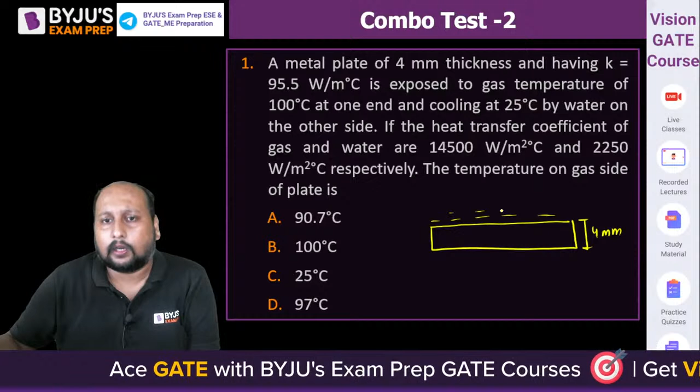Let me draw the diagram to help you guys. This is your plate, having a thickness of 4 mm. Above this we have gas, whose temperature is somewhere around 100 degrees Celsius. Below this we have water, whose temperature on the other side is 25 degrees Celsius. You have to tell me what is the temperature of the plate at this interface. Let's say this is TP, which you have to calculate.

Here is your gas, here is your water, and they have given you the convective heat transfer coefficient for gas and water: Hg is equal to 14,500 watt per meter square degree Celsius, and Hw is equal to 2250 watt per meter square degree Celsius. Quickly tell me what will be the temperature at this TP.

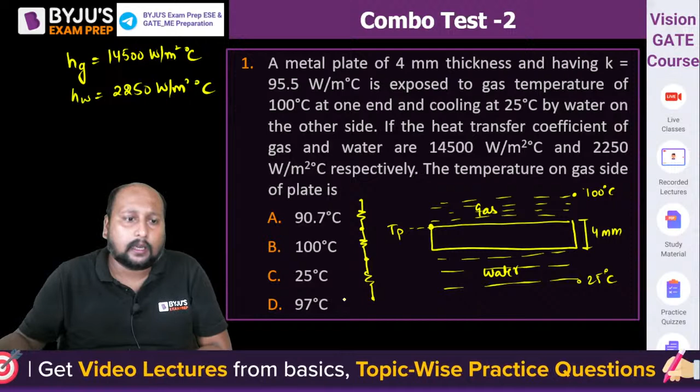Now, can we say these are three resistances connected in series? If you look carefully, this is your convective resistance, this is the conductive resistance, and this is your convective resistance. Fine, these are three resistances connected in series. If you try to draw it in a horizontal way, this is...

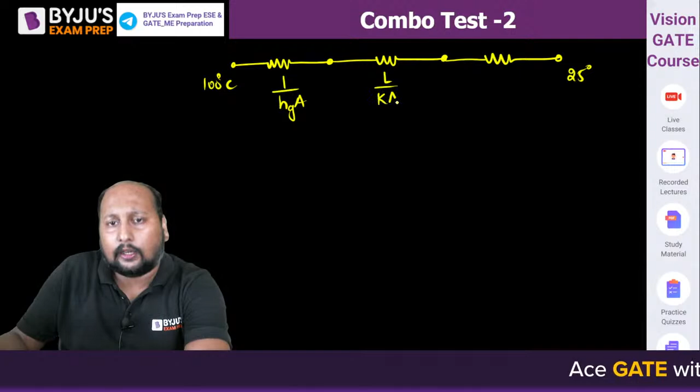your 100 degrees Celsius, right? This is the convective resistance, this is your conductive resistance, and this is the temperature of the water, that is 25 degrees Celsius. If I write the flux equation: 1 upon Hg into A, plus L by K into A, plus 1 upon H of water into A. This is the total resistance.

Let's do it. So heat flux is equal to, let me calculate first the total resistance. The total resistance is equal to 1 upon Hg into A plus L by K into A plus 1 upon Hw into A. The value of Hg you know, that is 14500.

Let us take A as common. Length is 0.004 divided by K value, what is the thermal conductivity? 95.5, okay, plus 1 upon 2250. I'm taking A as common.

So tell me, what is the value of the total resistance that you are having? I'm taking A as unity, I'm taking A is equal to 1 meter square. I'm calculating the heat flux.

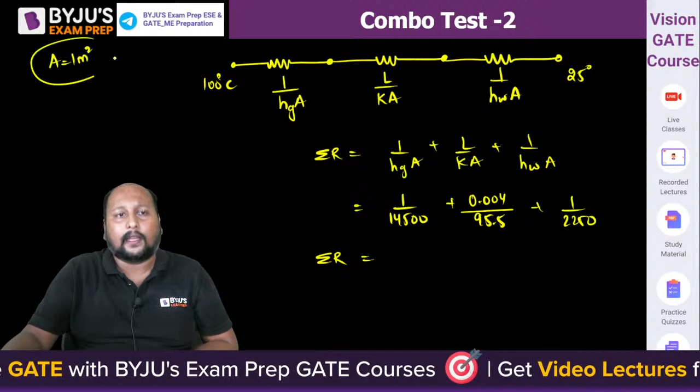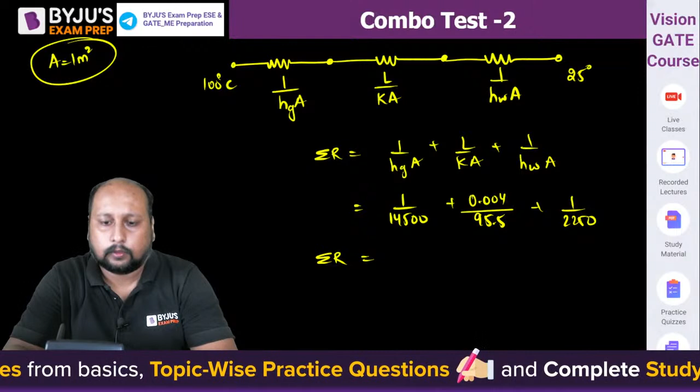So what value are you getting? Approximately you can calculate, let me know. Let's try to calculate. So 1 divided by 14500 plus 0.004 divided by 95.5 plus 1 divided by 2250.

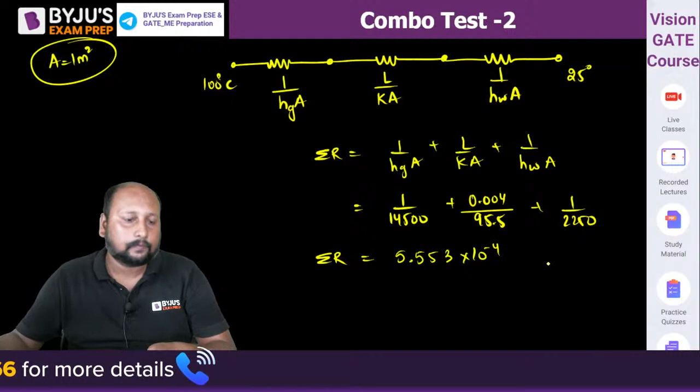Are we getting 5.55? Are we getting 5.553 into 10 to the power minus 4? And the unit will be meter square Kelvin by watt.

Yes, done, okay. So we got the value of R. Now we can calculate heat flux, which is equal to the temperature difference divided by the total resistance.

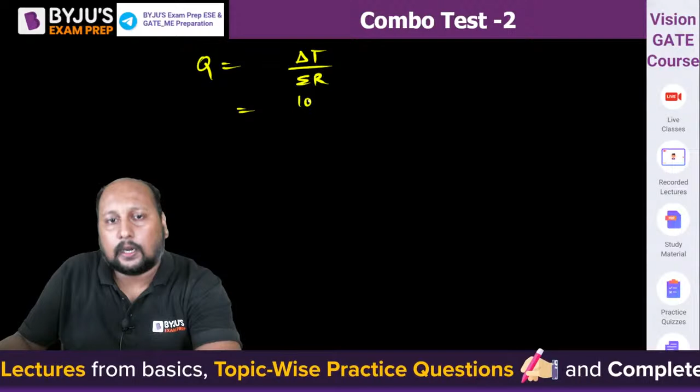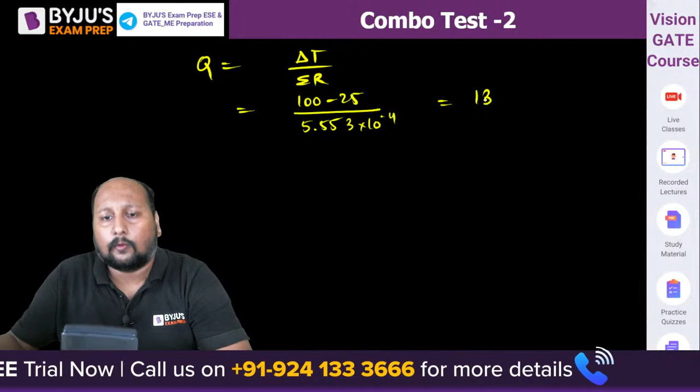Okay, now we know that. Now they are asking you what is the temperature of this TP, so we can take this equation. You take this one: we can say Q is also equal to 100 minus TP into H of G, right?

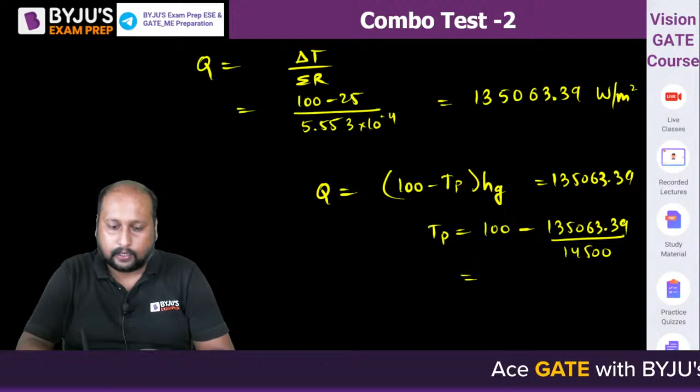What value are you getting? That is 14,500. 100 minus the answer, are we getting 90.69 degrees Celsius? This is the temperature of the plate that we are getting. This was a 2 marks type question.

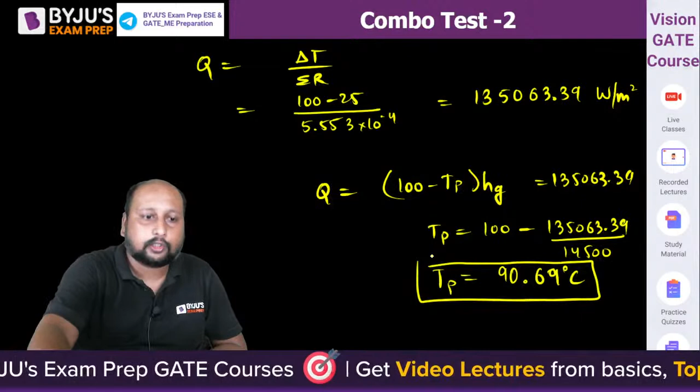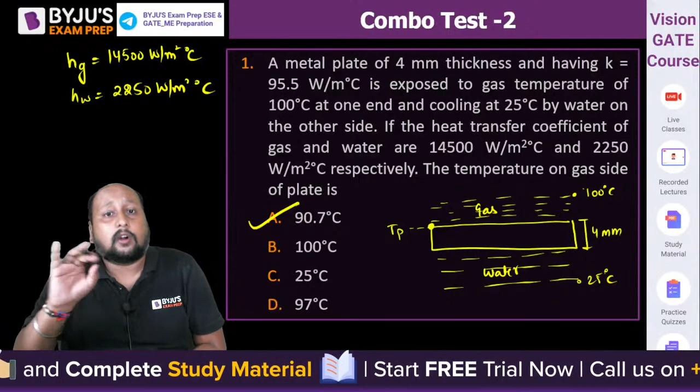Okay, 90.69. Option A is the correct answer. The first question was a 2 marks type, we have solved it completely. 90.69, that is 90.7 degrees Celsius, is the correct answer. The question was not difficult, only thing is you need to have the correct approach.

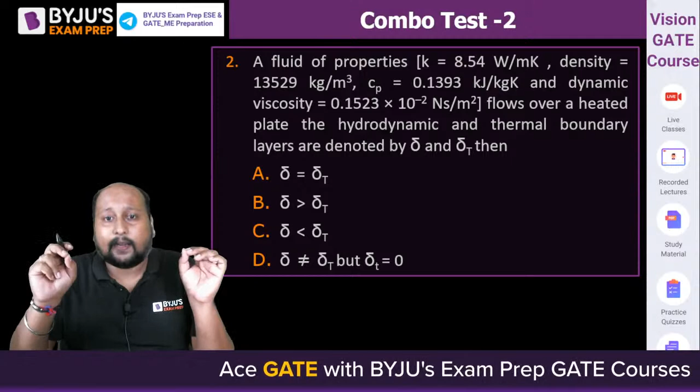Question number 2, a very easy question, a 1 mark type question. A fluid of properties: K value is given, density is given, specific heat is given, and dynamic viscosity is given, flows over a heated plate with a hydrodynamic boundary layer and thermal boundary layer thickness denoted by delta and delta T.

Which of the following is correct? So to identify this, we have to calculate the Prandtl number. Prandtl number is equal to mu Cp by K. Just check this, whether Prandtl number is greater than 1 or less than 1, that's it, the answer will come.

Mu Cp by K, so this is equal to 0.1523 into 10 to the power minus 2. Cp is 139.3 divided by K is 8.54. Tell me, what is the value?

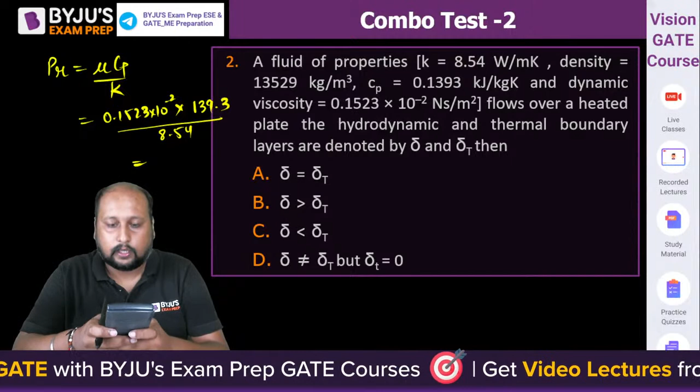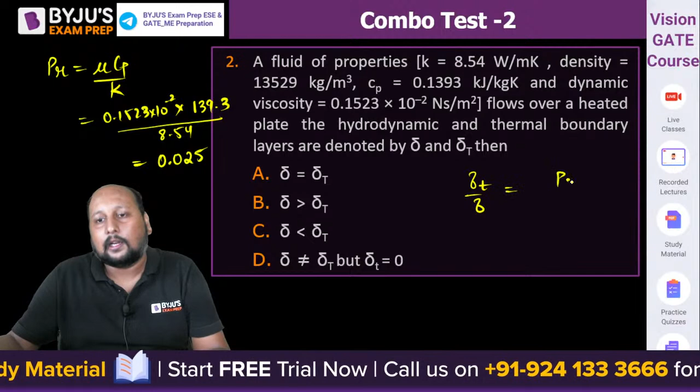Are we getting 0.025? And we know that delta T by delta is equal to Prandtl to the power minus 1 by 3 divided by 1.026. So approximately we can say as Prandtl number is less than 1, delta T is greater than delta, because Prandtl number is less than 1, right? So option C is the correct answer.

Option C is the final correct answer. Is that clear to everyone? Let's move ahead, very good.

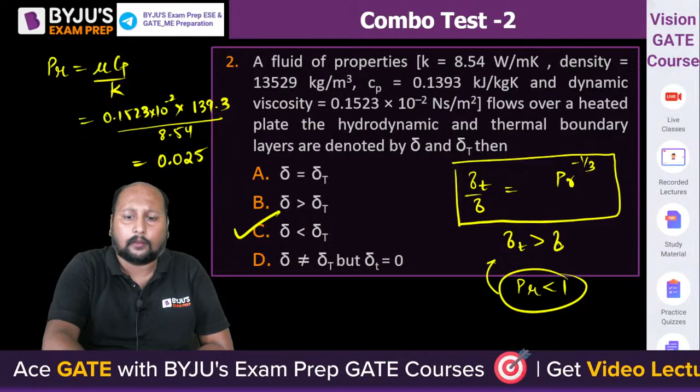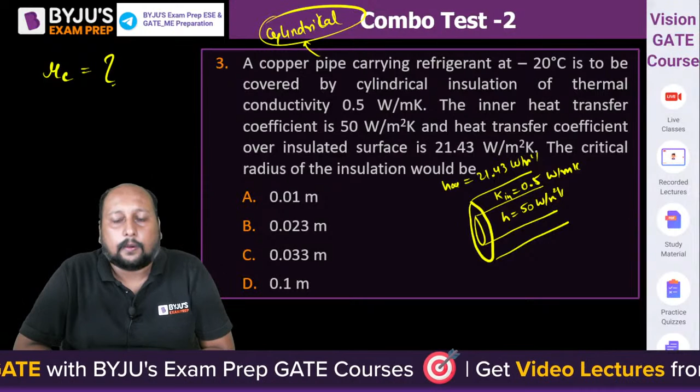What is the value of critical radius of insulation? Option A, option B, option C, or option D? It is equal to the insulator divided by the h of your ambient outer, that is h infinity. That is equal to 0.5 divided by 21.43. Solve it.

The answer for this is option A, B, C or D: 0.5 divided by 21.43, that is 0.0233. Option B is the correct answer. Are we getting option B?

Always remember, we always need to take the convective heat transfer coefficient of the ambient surface, because the insulation is always given on the outer surface. Whether heat dissipation happens from outside or not, that's the reason we are giving the insulation. So we are always dealing with the convective heat transfer coefficient of the outer surface. Option B is the correct answer.

They have given both H of the inner surface and outer surface, so make sure you don't get confused. If you do it that way, that would also seem like an answer. If you take H equal to 50, that is also present there. I think option A or D would be the incorrect answer that results, meaning option A would come up, which is incorrect. Is that clear? Understood? Done?

Question number 4 on the screen. An enclosure 1 x 2 x 4 consists of 3 surfaces. Flat surface at the bottom, 1 x 2, having an area of 2 meters square. The flat surface at the top is 1 x 2, A2 is 2 meters square, and all vertical surfaces together are taken as A3, that is 24 meter square. All the surfaces are flat.

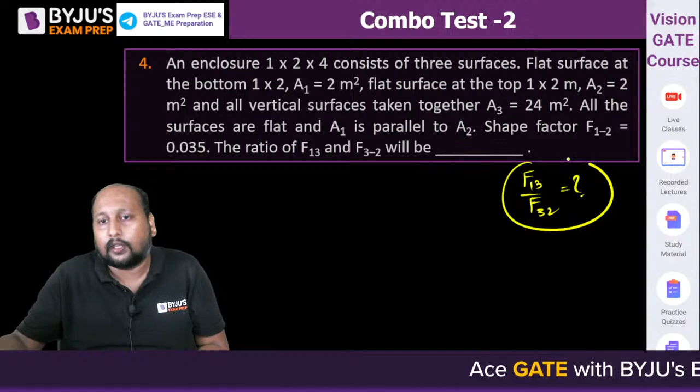They have not given the diagram. They are asking you what is the ratio of F13 by F32. This is the ratio they are actually going to ask. Tell me quickly. This is a 2 marks question in the exam, very easy, but I'm still giving you 2 marks for this because students actually get confused when they are not seeing the diagram and the question is being asked from shape factor.

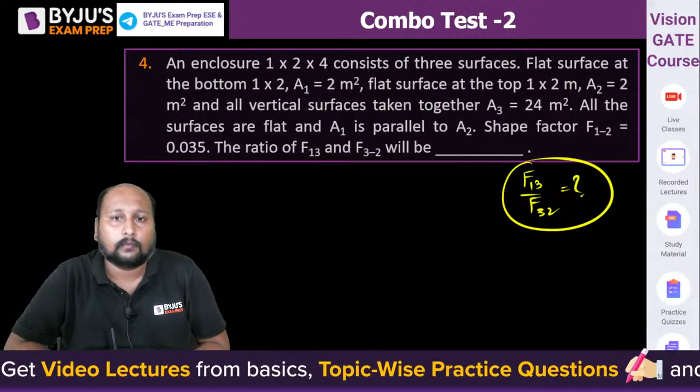They are saying that all your surfaces are flat. So can we say F11 is equal to 0, F22 equal to 0, F33 equal to 0, because for a flat surface the self shape factor is not present. Now they have given F12, that is equal to 0.035.

Can we calculate the value of F13? F13 we can calculate. So F11 plus F12 plus F13 using summation, that is equal to 1. So from here F13 is equal to 1 minus 0.035, that is basically 0.965.

0.965 is the value of F13. F13 done. Now next target is we need to calculate F32. How do we find F32? If I'm able to calculate F21, we can use F21 plus F22 plus F23. So from there F23 is calculated, and once F23 is found, F32 will also be found, because area is already given. Use the reciprocity theorem.

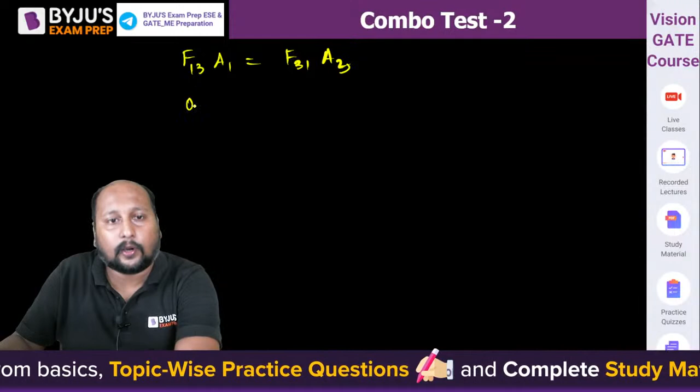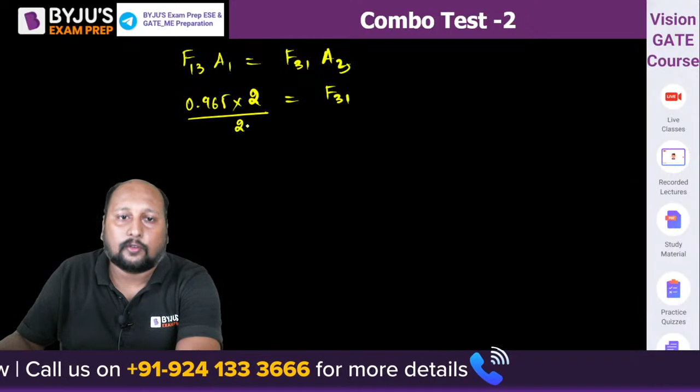F13 times A1 is equal to F31 times A3. F13 is already calculated, that is 0.965, A1 area is 2 meter square. F31 we need to calculate, divide by A3, which is 24 meter square, the total area. So from here I can get the value of F31. What's the value? Has anyone calculated it?

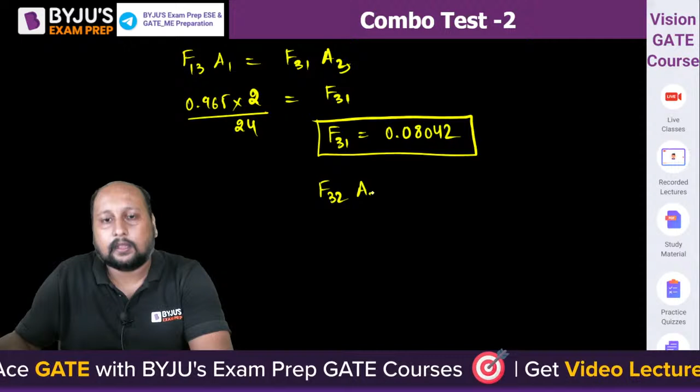0.08042. Okay, so from here I can calculate F32. We can write F31 plus F32 plus F33 equal to 1. F33 is 0, since the self shape factor for a flat surface is 0. So from here F32 is equal to 1 minus F31. 1 minus the answer gives us 0.9196.

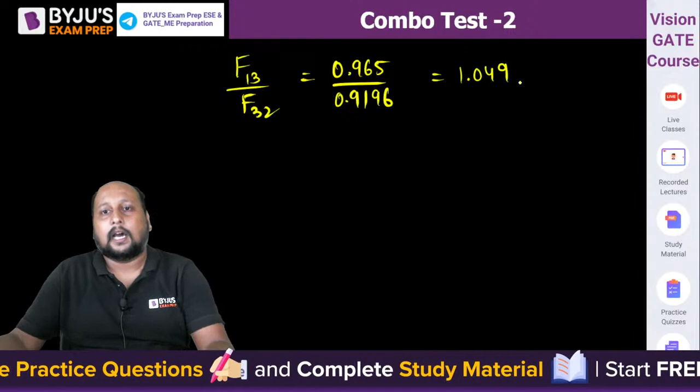Okay, we got the two values. Now the question is, what's the value of F13 by F32? We have calculated F13 and F32, so we can calculate F13 by F32. F13 is 0.965 and F32 is 0.9196. Approximately what's the value? Divide, and we get 1.049. Are we getting 1.049? Yes, this is the final answer.

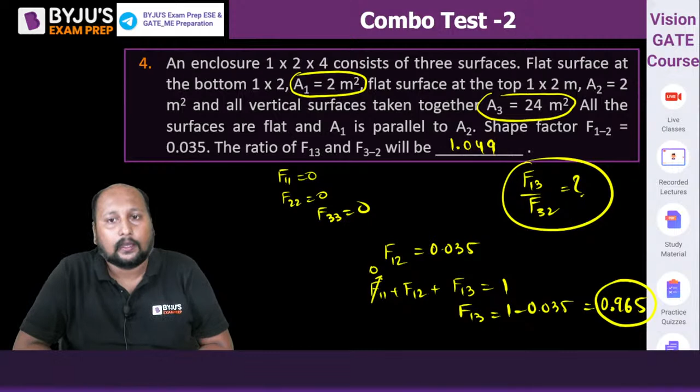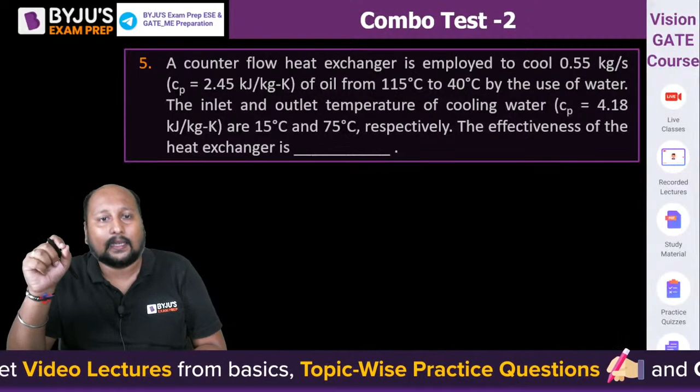A counterflow heat exchanger is employed to cool 0.55 kg per second of oil from 115 to 40 degrees Celsius by the use of water. The inlet and outlet temperature of the cooling water is given. What is the effectiveness of the heat exchanger? Simple question, a very easy question guys. Quickly.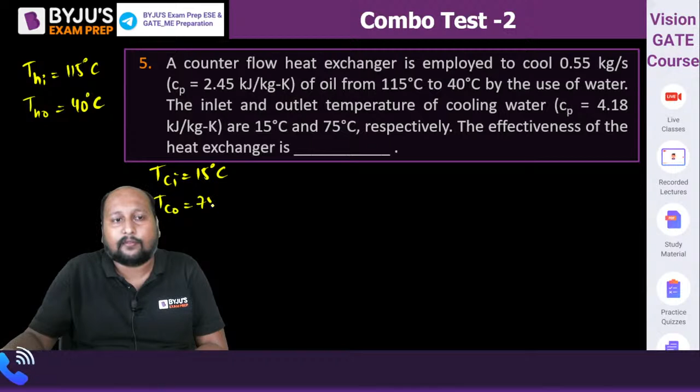Very easy question. They have given the hot inlet temperature as 115 degrees Celsius, hot outlet temperature as 40 degrees Celsius, cold inlet temperature as 15 degrees Celsius, and cold outlet temperature as 75 degrees Celsius. So using energy balance, whatever heat is lost by the hot fluid, the same amount of heat will be gained by the cold fluid. So I can write CH(THI minus THO) equal to CC(TCO minus TCI).

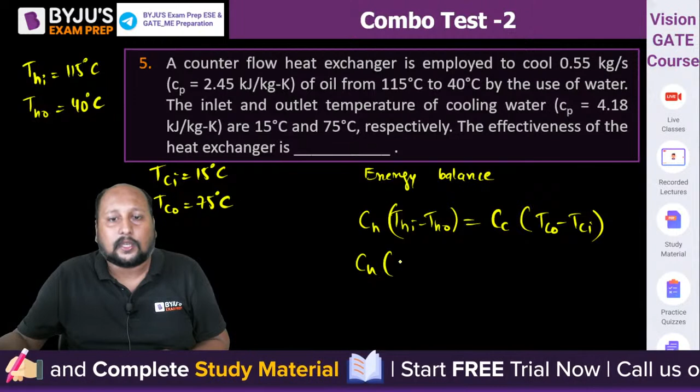Why are we doing this? We need to identify which fluid has the minimum heat capacity rate. So CH(115 minus 40) is equal to 75 minus 15 into CC. Tell me what value you are getting. 115 minus 40, that is 75, is equal to CC into...

CH is your C minimum, yes or no? CH is your C minimum, right. If my hot fluid is C minimum, then we can use effectiveness equals actual heat transfer divided by maximum possible heat transfer. Actual we take as CH(THI minus THO) divided by C minimum into the maximum temperature difference, that is THI minus TCI. So these two get cancelled out. Hot inlet: 115 minus 40 divided by 115 minus 15.

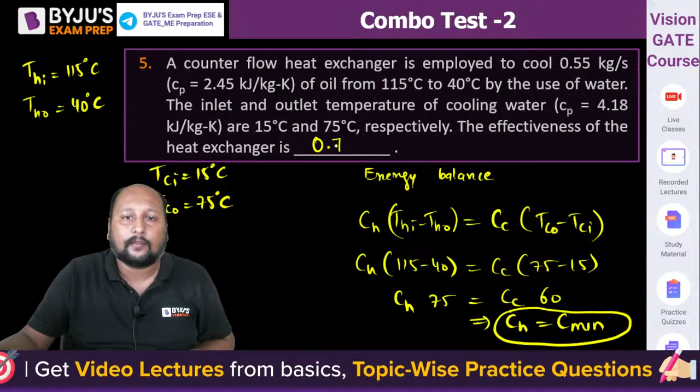How much did we get? 75 by 100, that is 0.75. Are we getting 0.75? That's the effectiveness of the heat exchanger everyone. 0.75 is the effectiveness of the heat exchanger we are getting. So the answer is 0.75. Clear? Everyone, 0.75 is the effectiveness of the heat exchanger for this particular counterflow heat exchanger.

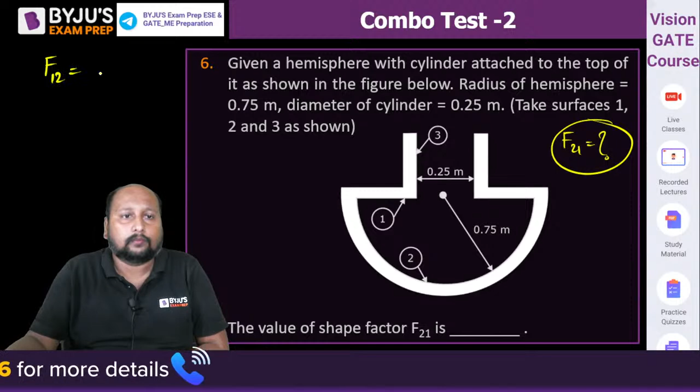What is the shape factor F21? Tell me what will be F12 - see the diagram and tell me. Surface 1 is flat, so F11 equals 0, and because it is projecting towards surface 2, all the radiation leaving surface 1 has to hit surface 2. So can we say F12 is equal to 1?

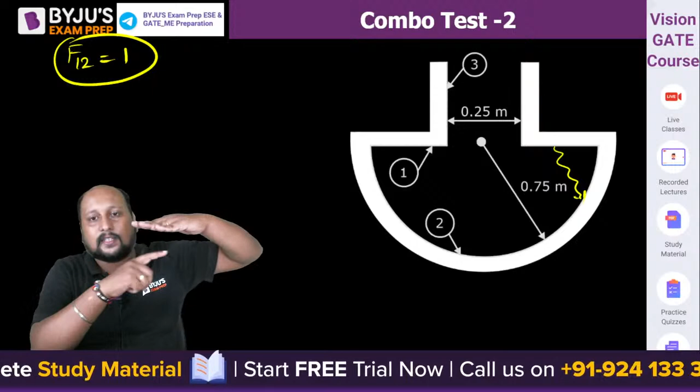Yes. F12 - this is surface number 1, all the radiation leaving surface 1 has to reach surface number 2, so F12 is equal to 1. So can we calculate the value of F21? That is asked in the question. Let's try using the reciprocity theorem.

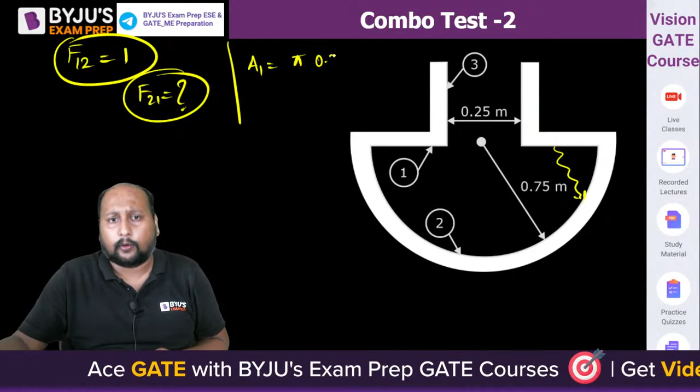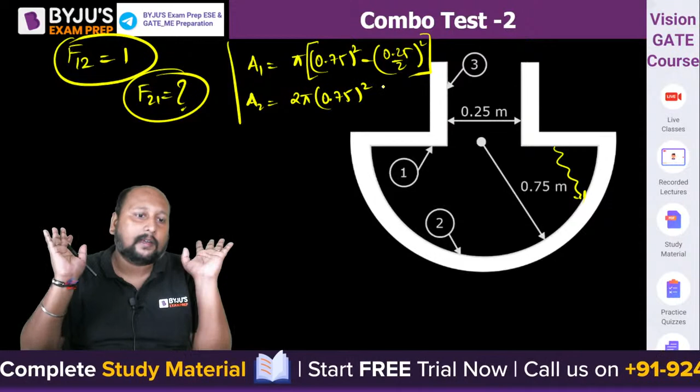What is the value of area A1? Area A1 is equal to this circle, that is pi into 0.75 whole square, minus this area, that is 0.25 by 2 whole square. This is area A1. What is area A2? A2 will be equal to 2 pi into 0.75 whole square. Solve it and tell me what is the value of the shape factor.

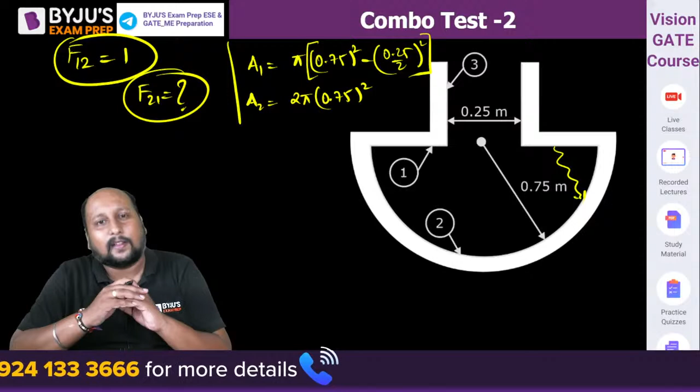F12 times A1 equals F21 times A2, from here we have to find F21, so F21 is equal to F12 A1 by A2. F12 is 1, A1 is pi into 0.75 square minus 0.25 by 2 whole square, divided by area A2 which is 2 pi into 0.75 whole square. Try it, pi gets cancelled out, what value are you getting?

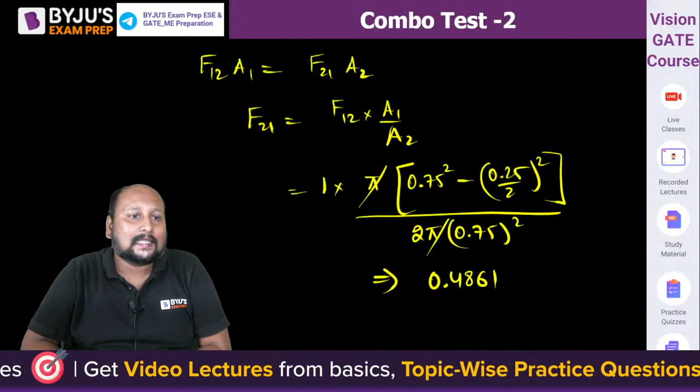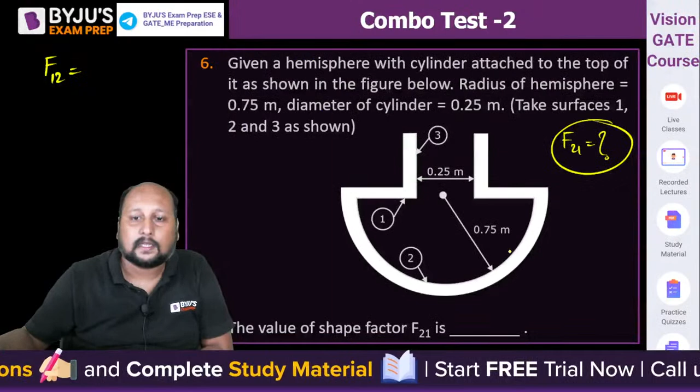0.4861. Yes, are we getting 48% of the radiation leaving from surface 2 will be hitting surface 1? Okay, 0.4861 is the answer, 0.486, clear? Done, done, very good.

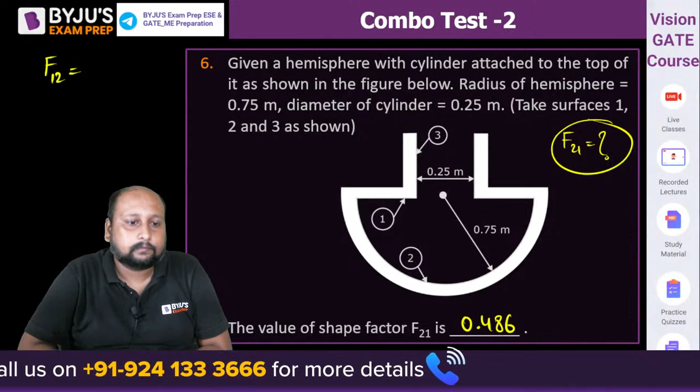A steam power station using the following property table to evaluate the various parameters regarding the power plant performance. The steam rate is given as 200 tons per hour. The overall heat transfer coefficient for the condenser is 3200 watt per meter square Kelvin. Inlet and outlet temperature of the cooling water is 30 and 40. What is the area of the tubes of the condenser? They have given you this table. The quality of the steam at the turbine exit is 0.88, pressure 150 is given, and 0.13 bar is being given. You have to tell me what is the area of the tubes of the condenser.

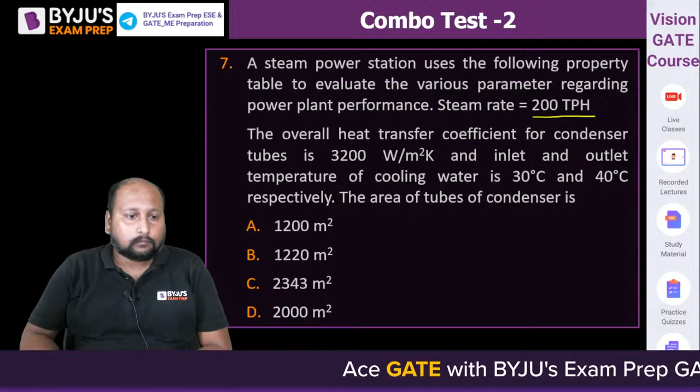The question is quite easy but students do get confused - which phase do we consider. Look, condensation process means the hot fluid is changing its phase, this is for sure. Condensation means hot fluid is changing its phase from gaseous to liquid, right? And cold water is undergoing temperature difference from 30 to 40, so we can say this is the temperature profile.

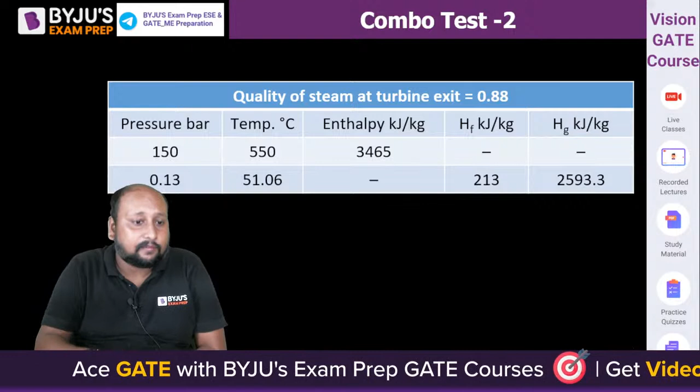Okay, parallel or counter doesn't matter in phase change, both give the same results. Now the question is, what will be the temperature of the hot fluid? Two temperatures are given to you. Can you understand from this concept which temperature we should be taking, 550 or 51.06? Which temperature will you take, that is important.

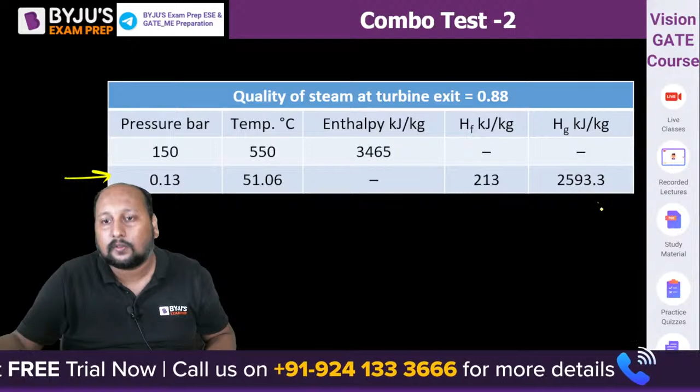Now if you try to visualize, at 150 bar it is 550 degrees Celsius, but it is only given the enthalpy value, they are not giving HF and HG values, and they are talking about phase change phenomena. So definitely we have to take this value, we have to take this one. Is this clear? Understand the question - they have given temperature and enthalpy value at two pressures, right? Because the steam is having a phase change phenomena, we have to have HF and HG.

We calculate enthalpy, remember to check the steam table - you've studied power plant, Rankine cycle, reheat cycle, regenerative cycle. We are using this kind of concept, so we have clubbed that concept in our heat exchanger. So now we can say the temperature here will be equal to 51.06.

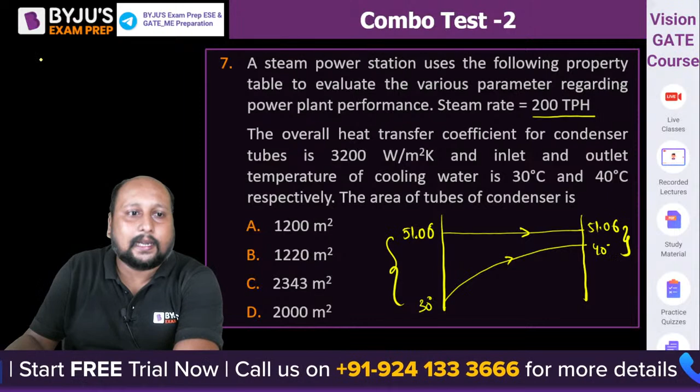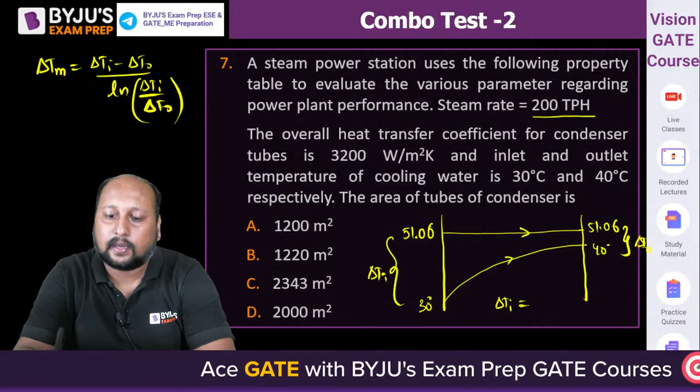Now calculate the value of LMTD quickly. So delta TM is equal to delta TI minus delta TO divided by logarithm of delta TI by delta TO. This is how it will be - this is your delta TI, this is your delta TO. Let's see how much it comes to. Delta TI is 51.06 minus 30, that is 21.06, and your delta TO is equal to 51.06 minus 40, that is 11.06.

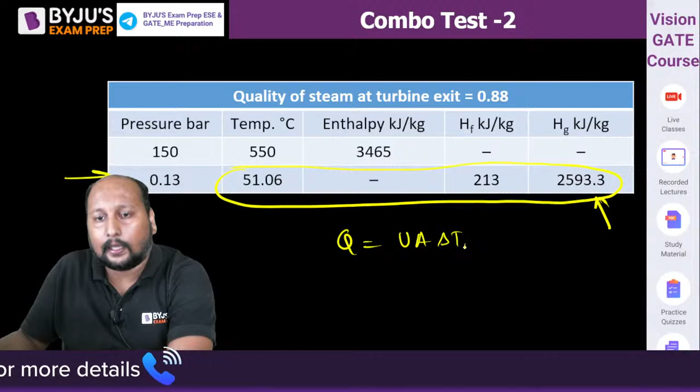Delta Tm, and we know that Q is equal to U into A into delta Tm. Overall heat transfer coefficient given to you is 3200, right? Fine, delta Tm you have calculated. Now the problem is we can equate this to what? We can say that is equal to m dot into x into HFG, and that too I'm talking at 0.13 bar, right? Yes, let's try this.

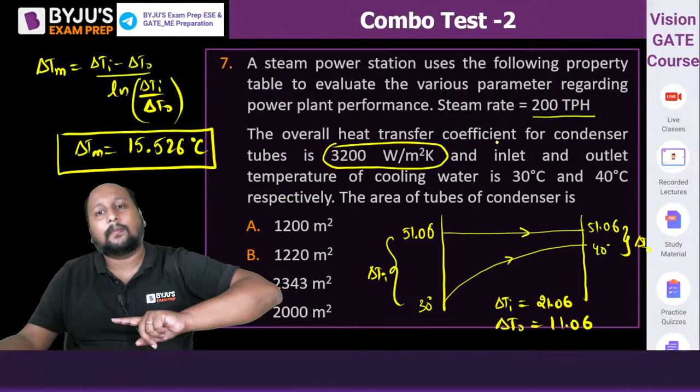So now we can say overall heat transfer coefficient is, let me write it over here, U into A into delta Tm is equal to x into m dot into HFG. So U is 3200, area we need to calculate, delta Tm we have calculated as 15.526. Mass flow rate, what is the value of mass flow rate, tell me. What's the value of m dot? They are given 200 tons per hour, convert into kg per second. So this is equal to 200 tons means 10 to the power 3, and per hour means 3600.

Have you given the quality of steam? They are given the quality of steam as 0.88, given in the table, 0.88 into Hg minus Hf, that is 2593.3 minus 213. Okay, 213. Yes everyone. And this is not given to you in kilo, they are given in kilojoule, so here you will also get 10 to the power 3. Okay fine, is this clear?

Quickly, what is the value you are getting? What is the value you are getting? So 200 into 10 to the power 3 into 0.88 divided by 3600 into 10 to the power 3 into 2593.3 minus 213, divided by 3200 into 15.526. Are we getting...

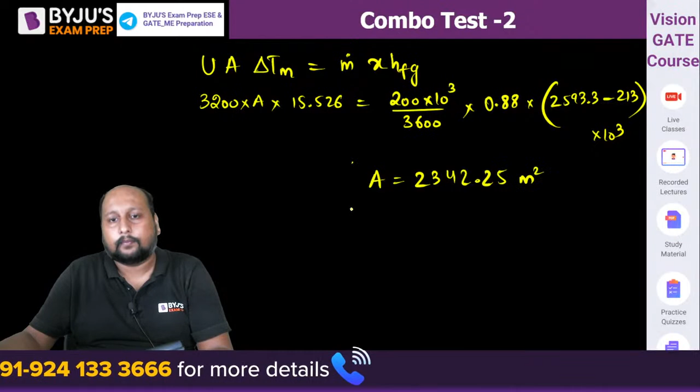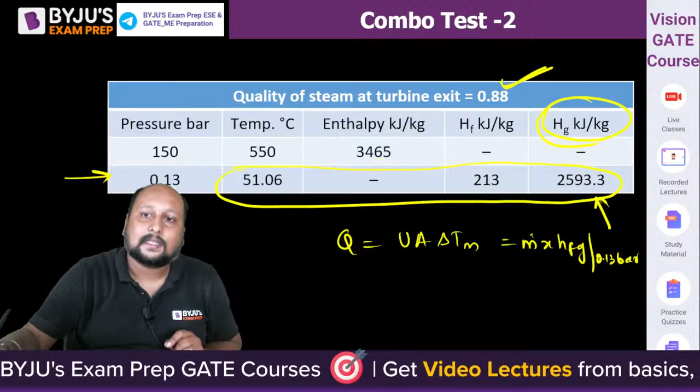2342.25 meter square? This is the final area, the area of the condenser is 23... See, you must not forget to use 10 to power 3, because this is given in kilojoule. This is the common mistake students do commit, they are not converting. On the left hand side U is given in watt per meter square Kelvin, on the right hand side it is given in kilojoule, so definitely now we can convert this, right? Okay, so we are getting this value to be 2342.25 meter square.

Hello Vipin, good evening, good evening.

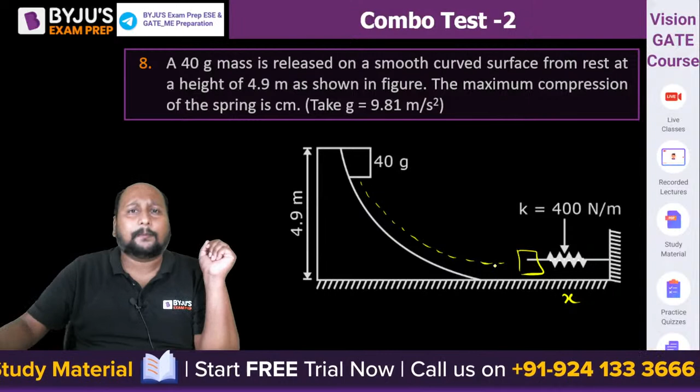Let's go to the next question, let's calculate. This is a 1 mark question, this is a very easy problem. A 40 gram mass is released on the smooth surface from rest from a height of 4.9 meter as shown in the figure. The maximum compression in the spring in centimeter is. What is the maximum compression in the spring? So let's say x is the compression, that's the x compression. This mass came on the smooth surface, it will be compressing. Equate it, smooth surface, no friction, go for energy balance. You should get the answer in a single line.

Potential energy gets converted into the potential energy of the spring, because ultimately it is being stopped. It comes with full velocity and will be compressing the spring and it will be stopped. So can we say mgh will be equal to half into k into x square.

Mass is 40 grams, g is 9.81, so 4.9... sorry, not 2, 1 by 2. What is the value of stiffness of the spring? That is 400 into x square.

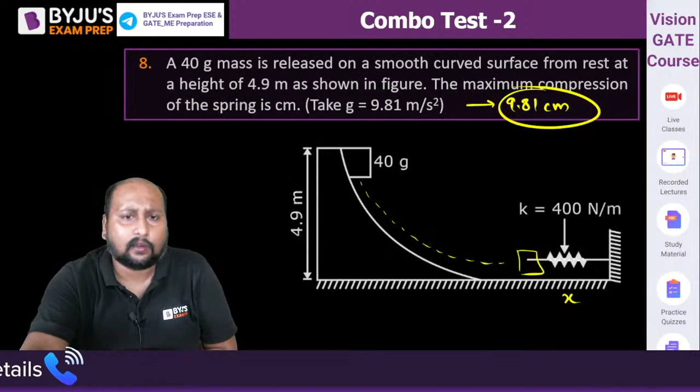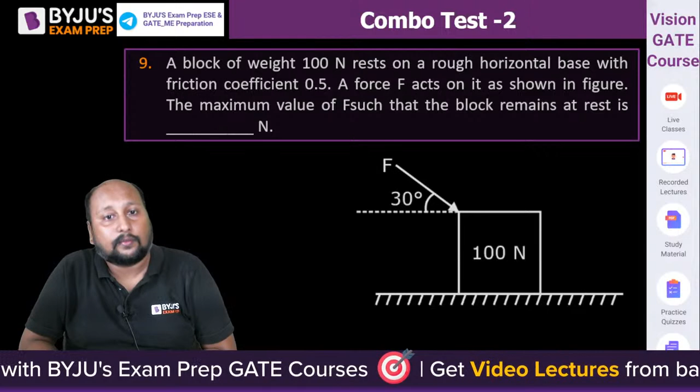Next question on the screen, I think this was an easy question. Next question, even easier, from the friction topic. A block of weight 100 Newton rests on a horizontal base with a friction coefficient of 0.5. A force F acts on it as shown in the figure. What's the maximum value of F such that the block remains at rest?

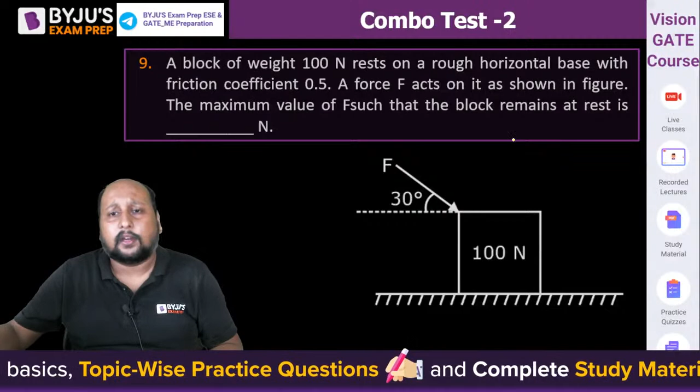That means the maximum value of F, such that the body is at rest - that means we are talking about the limiting condition, the limiting case, limiting friction. Calculate and tell me. Everyone will draw the free body diagram and from there we'll calculate the value of F. Let's make the FBD, so this is a block.

This is F cos 30, this is F sin 30, this is the weight, this is the normal reaction, this is the limiting friction. So we have identified everything.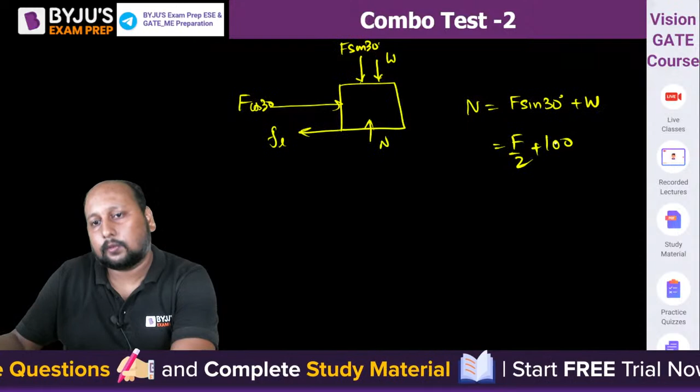We can say the normal reaction is equal to F sin 30 plus weight of the block, that is F by 2 plus weight of the block, 100 Newton. That is the normal reaction. And we are saying this is a limiting case, so FL is equal to mu into N, that is equal to F by 2 plus 100 into mu value 0.5.

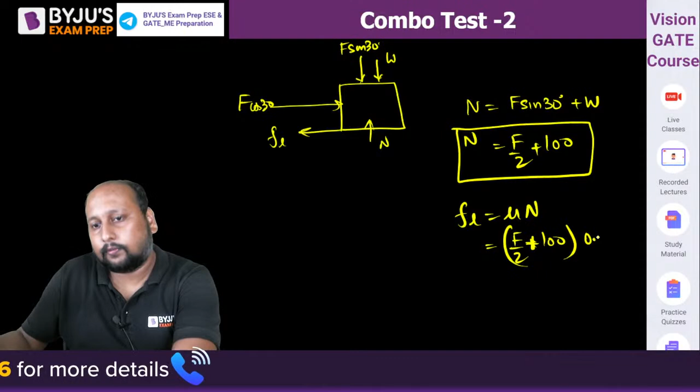To be in static equilibrium, we can say FL should be equal to F cos 30, because the total horizontal force should be equal to 0. This is a static condition, so F into root 3 by 2 is equal to 0.5 into F by 2 plus 100. Solve it and tell me what value of F you are getting.

What is the value of F you are getting? That is the final answer. Let's write it a bit and make it easier. This is 1 by 2, this gets cancelled out, so we are having F root 3.

F root 3 is equal to F plus 200 into 2, so F is equal to 200 divided by 2 root 3 minus 1. That's it, now just solve it. 2 root 3 minus 1, 200 by that, answer is 81.165 Newton. Are you getting 81.165 Newton?

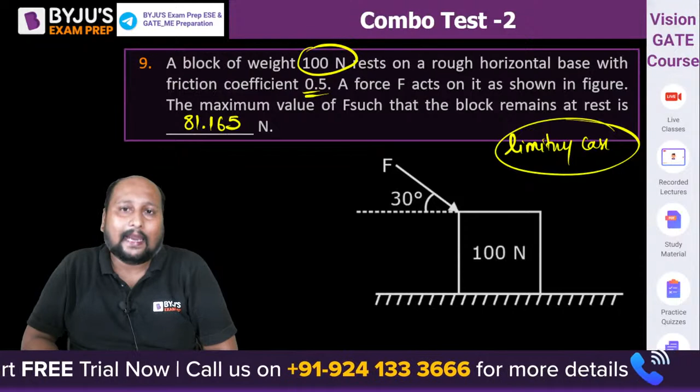Did they ask for 2 decimals? Okay. 81.165 Newton - if you need 2 decimals, the answer will be 81.17 Newton. 81.17 Newton is the correct answer. Is it done everyone, Vipin correct, Rekha correct, Mani correct, very good, very good. Vipin see, maybe a 1 is missing, it should come as 81.1 something, please do check, it's 81.16 something.

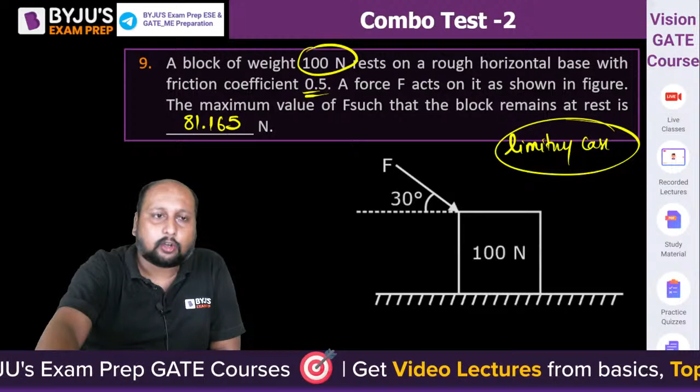Okay, next, a question from the truss topic - mechanics problems are incomplete without trusses. A truss BAECD is hinged at B, supported at D, and is subject to a horizontal force P as shown in the figure at point E. What is the force in the member BC?

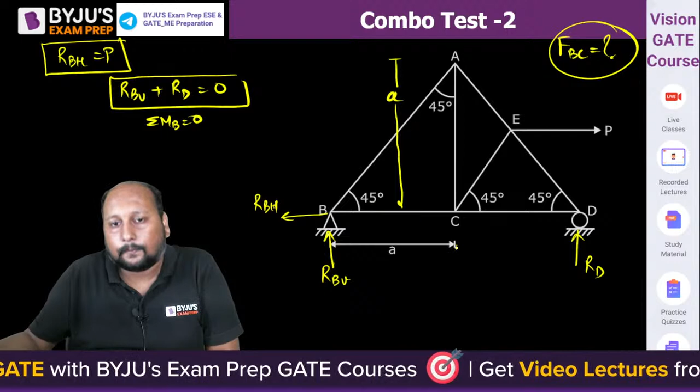Can we say this is also A? This height will also become A. This will also have a value of A. This also becomes A because this is 45, this is 45. If this is A, can we say this height? This is 45, this is also 45, this is also 45. So this will be exactly half, that is A by 2.

Go ahead and tell me what is the value of RB and RD. Let's take moment about point B. So P into A by 2 in the clockwise direction is equal to RD into 2A. So from here RD comes out to be P by 4.

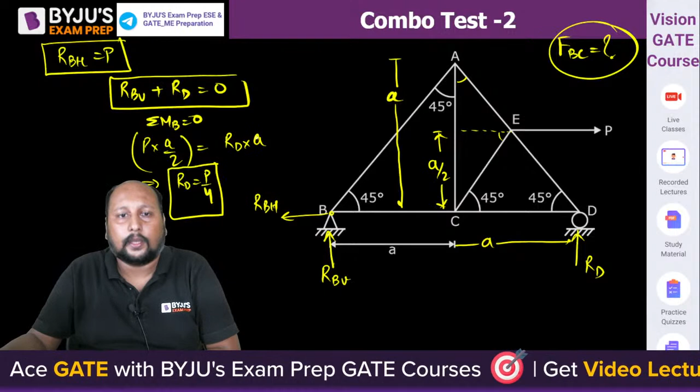Or 2A. RD is equal to P by 4. Yes, RD is equal to P by 4. If RD equals P by 4, use this equation. RBV is equal to minus P by 4.

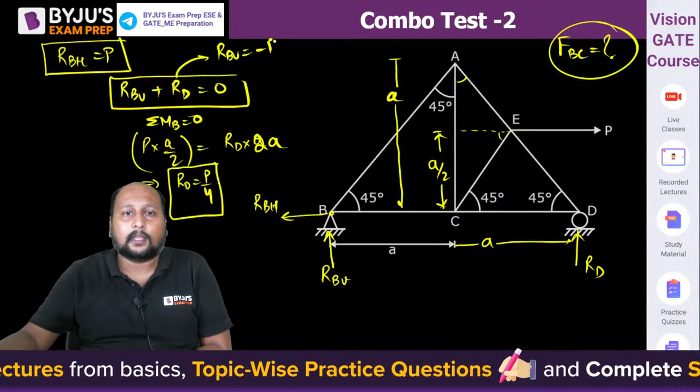So we can also do it this way, let's reverse the direction. So we can say minus of RBV plus RD. So from here RBV is equal to P by 4. Now let's get the value of FBC.

Take joint B. Take the free body diagram at joint number B. Draw the free body diagram at joint B. This is your joint B. This is FAB or FBA. This is FBC. This is P by 4, and this is P, at 45 degrees.

Quickly, what is the value of FBC? A simple question. What is the value of FBC? You can take the total vertical force equal to 0.

FBA sin 45 is equal to P by 4. Now let's take horizontal force, total horizontal force equal to 0. So I can say, let me write it over here, you might not be able to see it there. Total horizontal force equal to 0. So I can say FBC is equal to P minus FBA cos 45.

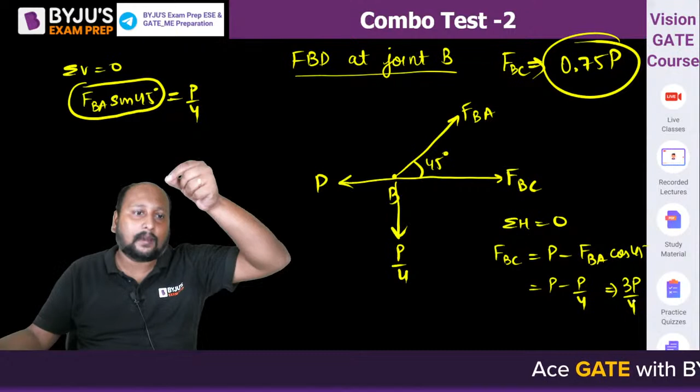I think you are getting option B as the correct answer. Are you getting option B as the correct answer? 0.75P. 0.75P is the correct answer. Done?

Vipin, Rekha, Mani, everyone.

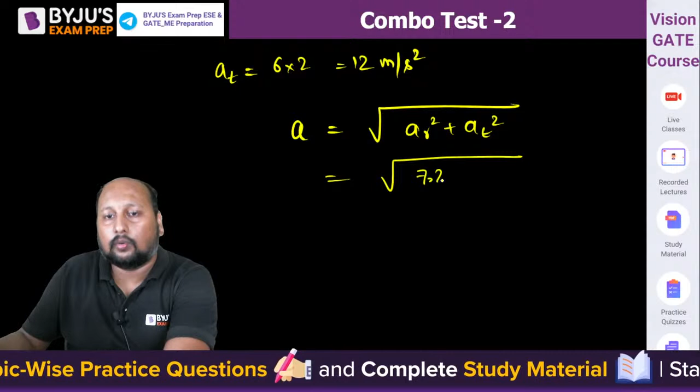So we got the tangential. We can say the acceleration at point P is equal to under root of radial acceleration square plus tangential acceleration square. Radial acceleration is 7.2, tangential is 12 meter per second square. So 7.2 square plus 12 square, under root of this. We are getting 13.99, round off we can say 14 meter per second square.

Okay, 14 meter per second square. So the answer for this is 14 meter per second square. Final answer. 13.99 we can round off to 14. If they have options, they can go for that. This was a NAT problem. So 14 meter per second square is the correct answer.